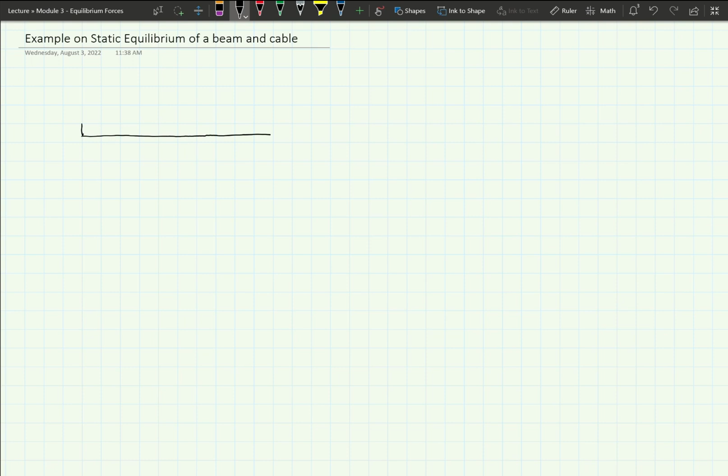We're going to do this structure right here. Okay, and I'm going to put an anchor right here. So we have a pin right there. We're going to call this A, and over at this end is B, and then we are coming down to an anchor point here that's called C.

Okay, and this would be really easy if that's all there was to it. So we're not doing that. We're going to make it complicated. We're going to put a force here at 15 pounds. We're going to put a force here at 20 pounds. And you know what? Here's another lesson I learned years ago as a student too, so I should do it. Try to draw your visuals so that they look like the size of the forces they are.

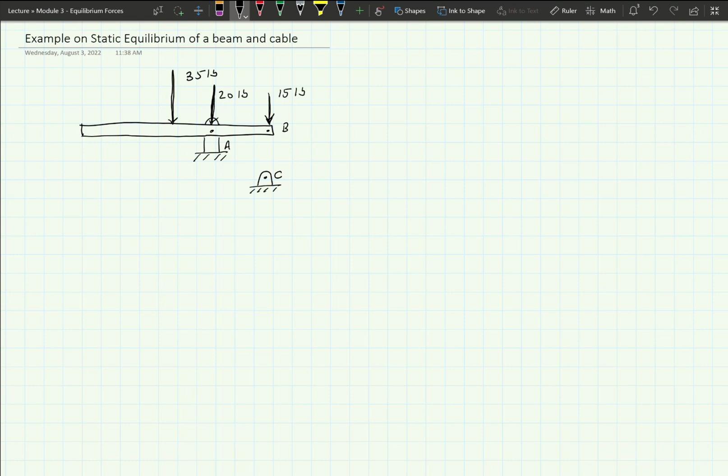We're going to do another one here, and this will be at 35 pounds. And another one here, and this is going to be 20 pounds. And of course we want to have one hanging way out here, and this is 15 pounds. Now we are 6 inches between here, 8 inches between here, 8 inches between there, and 6 inches between there. So that's our dimensions.

Now we're going to actually have a cable that holds this back like so. So literally this is the cable of the beam and cable. Alright, so how do we do this? Well, we need to determine what's going on and figure out what we have. So free body diagram time. I'm going to draw it like so. Our first point is right here at A,

and we have another one here at B. I'm going to switch to red so you can see this, but we're going to have an A of X force, and an A of Y force. Then we are going to have 15 pounds here, and our 20 pounds here, and I need to pause for a minute.

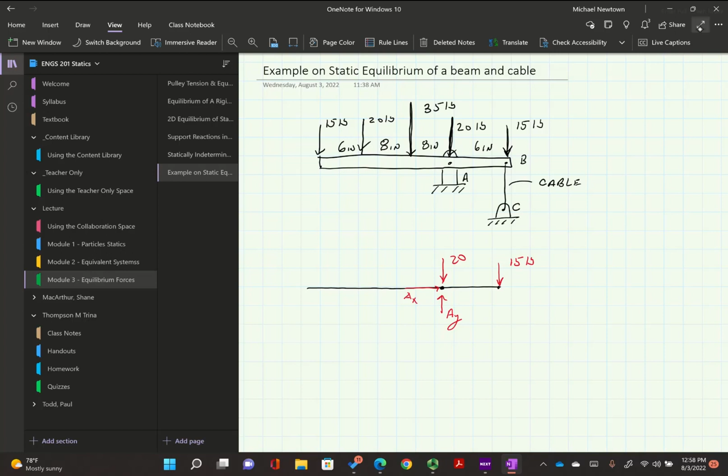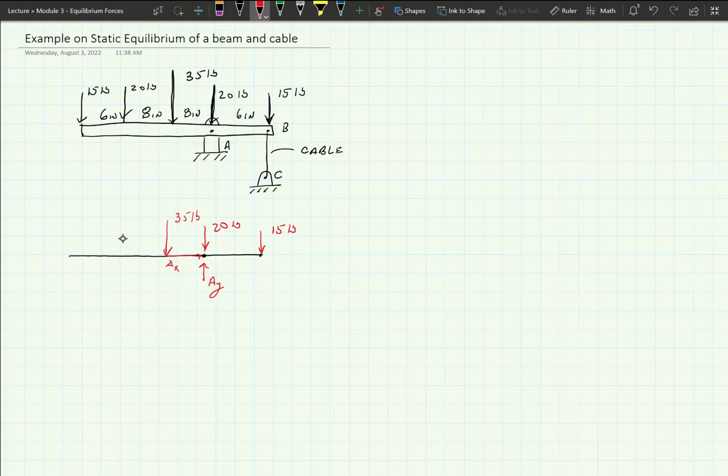So we're in the midst of putting forces on here. We have 35 here. We have 20 here. And we have 15 out at the end. Okay, so there's our forces, and that's our free body diagram with now this one, which will be the tension on this, and we're going to label this one F BC.

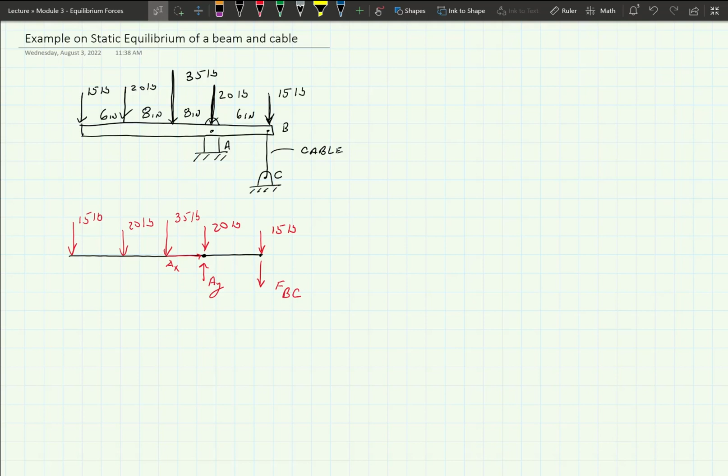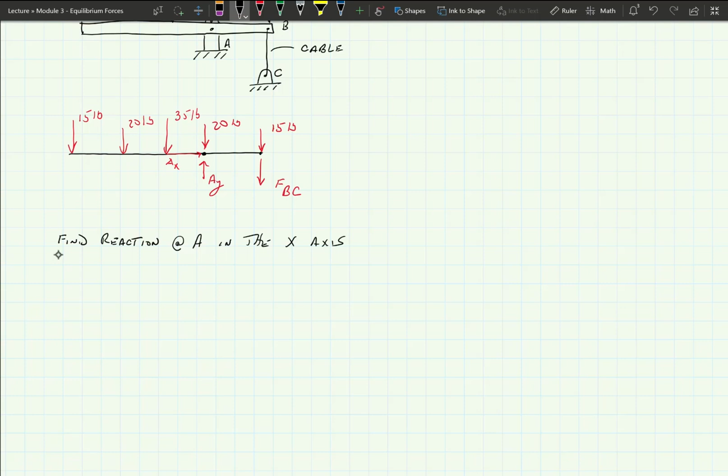Okay, so in order to find all this, we need to start doing things. We're going to write it like this. Find the reaction at A in the x-axis. Right? So positive to the right, sum of the forces in the X, and basically we're going to find out that A of X is equal to 0.

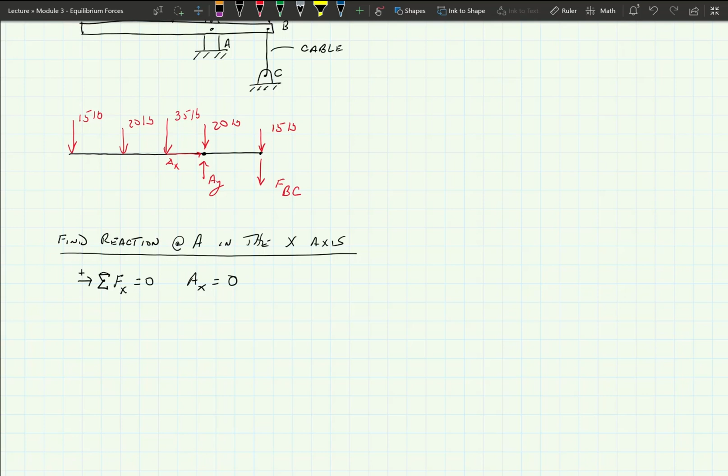Actually I don't need that in there. There are no other forces acting at that point. So basically this is just a pin with the vertical forces loaded on it. Okay, so that part's easy. All right, find the reactions at A in the Y axis. And with that one, I'm going to cheat.

I'm going to start with the sum of the moments, because it's a little easier to do that and then solve for the sum of the forces as a check. But basically, remember, sum of the forces in the X, sum of the forces in the Y, and sum of the moments. Use those three to solve this. But I'm going to start with the moments, because I'm going to take a moment about point B and figure out what AY is.

So I'm going to start over here and work my way left, and when I'm all said and done, I'll need to figure out what the tension is in BC. I'm going to make that way positive based on everything that's going on with the forces up above, and we're going to do sum of the moments about point B. That's going to be equal to 0, and let me bring that back down here.

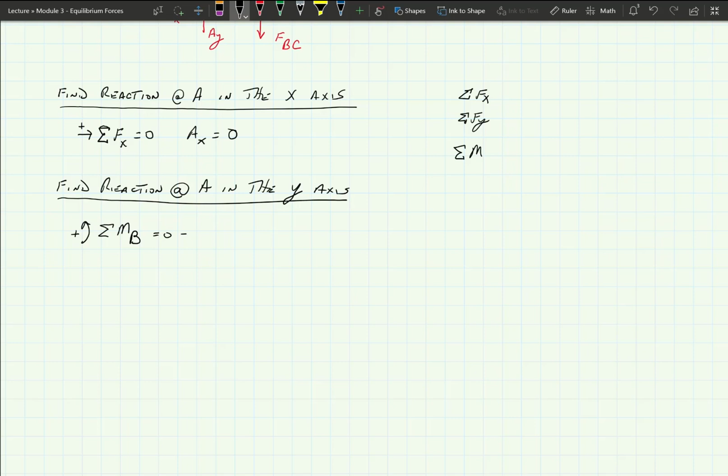So if I do it about this point right here, that means the 20 is going in the positive direction, the 35 is going in the positive direction, 20, 15. I just know that it's going to work out, that I'll get the answer I'm looking for.

But you could assume that counterclockwise or clockwise is always positive instead of going counterclockwise in this one. But as long as you pay attention to your signs, it's not going to change how you do this. Okay, so let me do this problem out for you.

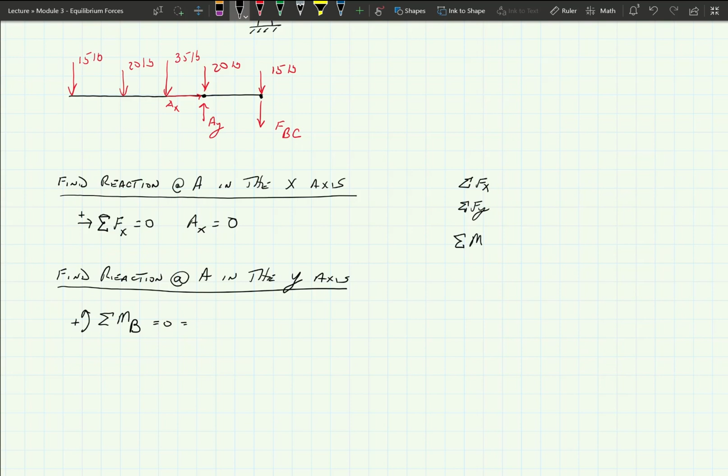So remember we had 6 inches here, 8 inches there, 8 inches there, and 6 inches there. Okay. All right, so I'm going to write down 15 pounds. I'm going all the way to the left, so that is times 28 inches. And it's positive because that's the rotation I'm looking at. And if I do 20 pounds, the next one is going to be 22 inches, plus 35 pounds, and that's going to be 14 inches.

Okay, and the last two are going to get stretched out here, so I'm going to write them over here. So we're also doing plus 20 pounds, and it's 6 inches, minus AY, and that's 6 inches also. Okay, so this was the first force, second force, third force, fourth force: 1, 2, 3, 4, and the fifth is AY.

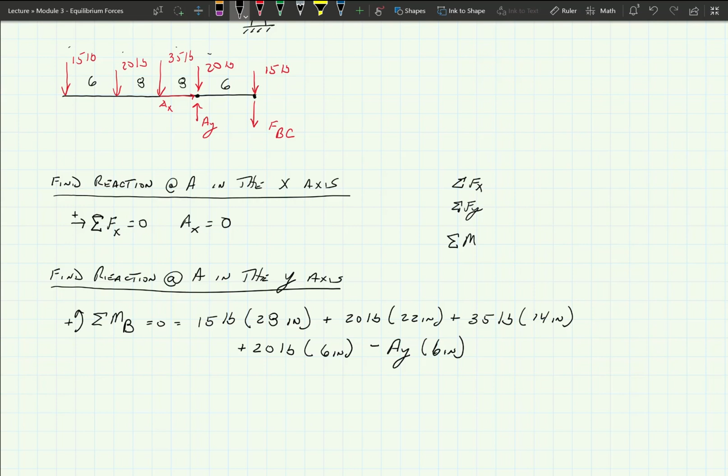Okay, and basically I'm going to rewrite the equation, and I'm going to assume that you can do the algebra that goes with this, but we're going to do all of this across the top. So let me do it out just to be on the safe side, but I'm going to not talk to you.

Okay, so 15 times 28, 20 times 22, 35 times 14, 20 times 6, and all divided by the 6 from the distance of the AY. And when I get done, I'm going to get 245 pounds, and that's positive, is the reaction for that. And if I go all the way over using the graph paper to my advantage, I'll write 245 pounds vertical. Okay, so that's what's going on there.

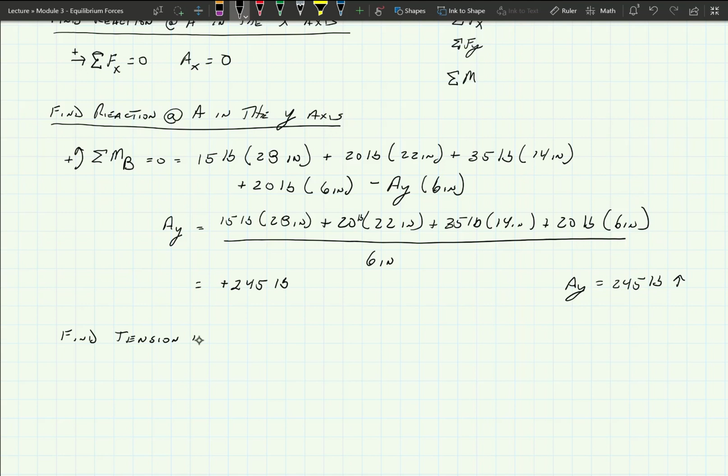All right, now find the tension in BC. So let's go back here and look at the drawing for a minute. So now I'm going to look for this one right here. If I take a look at this, I now know AY. I know all these other forces. I can figure this one out.

Okay, could do this with the sum of the forces in the Y, which would be great. Or just to get you used to doing moments again, I'm going to do it with the sum of the moments. But now we're going to take the sum of the moments about A. And I'm going to keep the same counterclockwise positive. Alright, set it equal to 0. We're going to do 15 pounds. Now, we're about A, so that means our distance has changed.

So there's now 22 inches to the left, plus 20 pounds, 16 inches to the left of A, plus 35 pounds, and that's 8 inches to the left of A, minus 15 pounds at 6 inches, minus FBC at 6 inches. Okay, so that accounts for all the forces.

So take some time here with yourself and look at these numbers and see how I did that. When I did the moment about A, I account for everything that's left and right of A. And notice that the 20 pounds at A does not affect the moment of this beam. So if it's acting at the point, you can neglect it. That's why we're taking it about A. So we get to get rid of that one and we get rid of the AY.

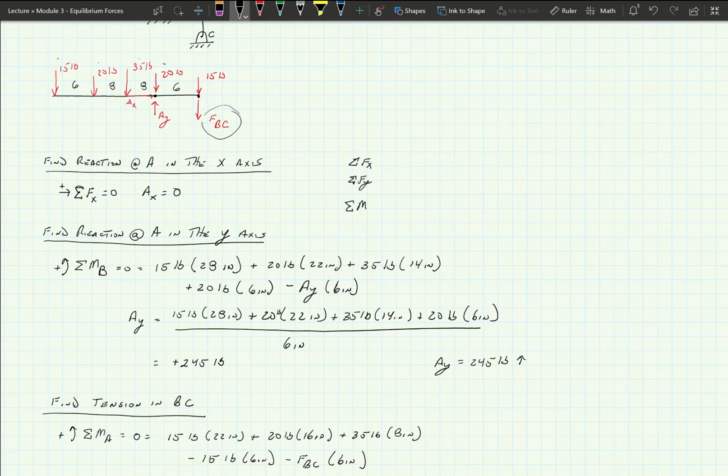So the 20 pounds there, if you like putting it down, think of it as 20 pounds times 0 inches, which means it's a 0, so it doesn't exist. Okay. So when we're all said and done, we're going to do the same thing. So FBC works out. I'll let you do the math, but basically I'm dividing everything in the numerator by 6 inches once I move FBC to the left, and we're going to get 140 pounds in tension.

Okay. Now here's a chance to use all this for checks. If you're not sure you did it right, let's do it this way. So positive up, we're going to do sum of the forces in the Y equal to 0 equal to minus 15 minus 20

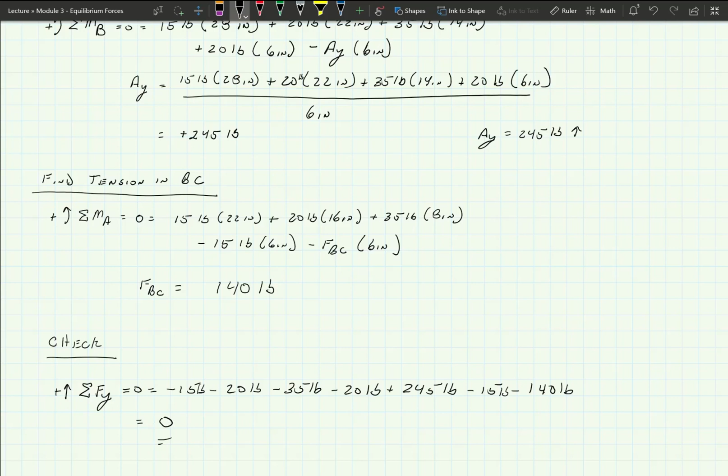minus 35 pounds minus 20 pounds plus 245 pounds minus 15 minus 140, and write the units down there, be consistent. And when all said and done, it should be equal to 0. And check, we did this problem correctly. Okay, it's as simple as that.

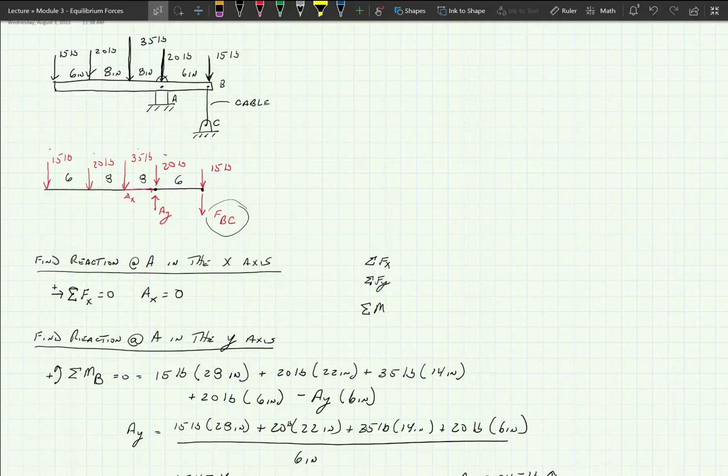And most equilibrium problems in statics are of this nature. You can use any of these three in any way to help you get to a solution. Most of the time you're going to have to do the sum of the moments to actually get to that. But then you check back with the sum of the forces in the X and Y direction. Okay, cool.